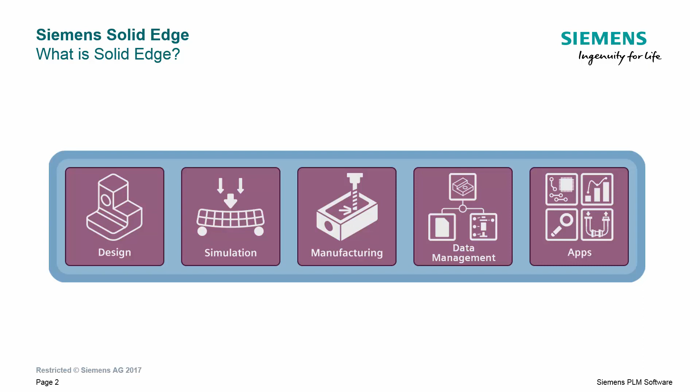The first segment is design, and is the core of what Solid Edge is all about. Solid Edge allows designers to intuitively create all aspects of their digital models, starting with conceptualizing and designing individual parts, using those parts to build assemblies, to outputting manufacturing instructions to physically create the design. These capabilities are supported by best-in-class design processes, allowing users to design faster, design better, and design with more confidence.

You may be new to the world of CAD, or computer-aided design, but even so, by now you may have heard the tagline, Solid Edge with synchronous technology. But what does that mean? To get a better understanding, let's take a brief look back in the history of CAD.

3D CAD started to become popular in the mid-1990s. Designers used collections of features such as extrusions, lofts, sweeps, revolutions, cuts, and holes to build digital models. Each new feature had to be built on top of the one created before it, utilizing the outcome of the previous in order to create the next. This process has been coined history-based modeling, or ordered modeling as referred to in Solid Edge.

Solid Edge has supported ordered modeling methods for over 20 years with both its strengths and inherent challenges. In history-based modeling, the structure and order of features control how models will react to changes or edits. This is valuable because it creates predictable results from edits on underlying sketches using precise dimension changes. Because of this feature control, automating changes and linking features together is quite easy.

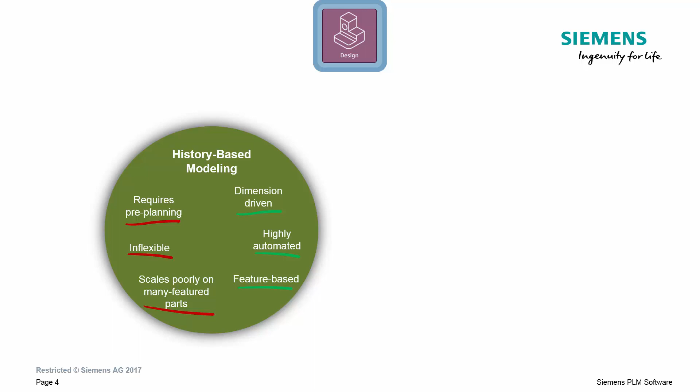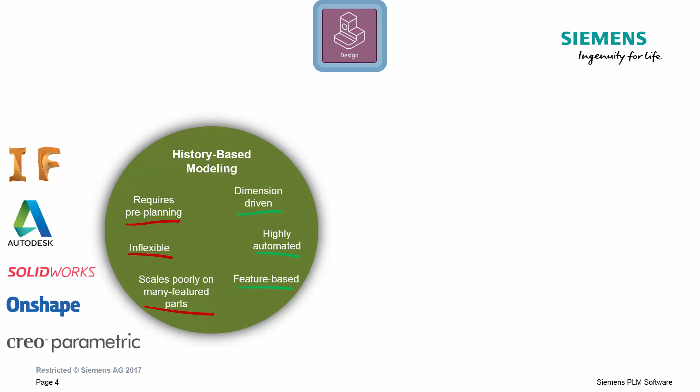And if a part contains large amounts of features, recomputes become quite taxing on computer performance, taking minutes to hours to recalculate the final result. While Solid Edge provides a choice to its users on how they wish to model, most other big names in the CAD industry only offer the history-based method. As there's no way around these inherent design challenges with history-based modelers, what other options are available?

Next up, direct modeling. Direct modelers use the complete opposite approach to design, maintaining no history of how a feature or a model is built, allowing for edits directly on the geometry on screen. Like history-based modeling, this contains its own values and challenges.

Direct modeling allows fast and flexible edits because there are no sketches driving features that make up the part. Editing is done by simply selecting what you want to change and changing it. With no rebuild of features after the changes, there are no performance issues on edits with direct modelers.

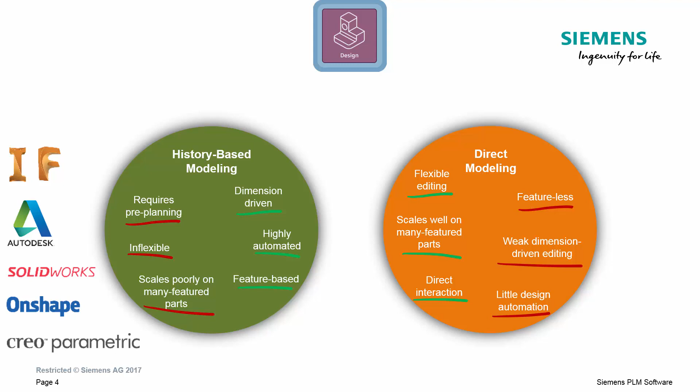However, since there aren't any features or history on how a part is made, creating precision edits or automations using parametric inputs such as dimensions is impossible. This creates a big issue for designers needing precision for their digital models. Some examples of CAD systems using the direct modeling paradigm are listed here.

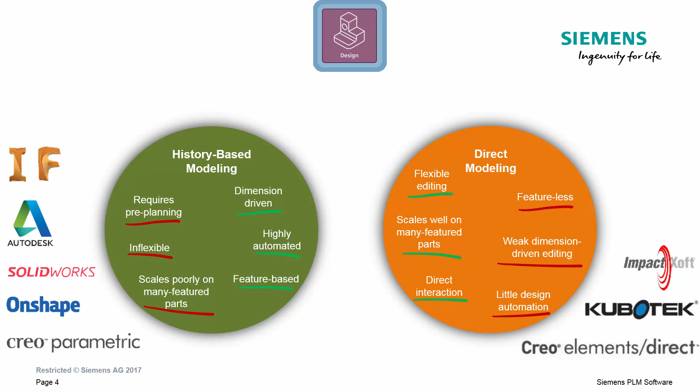Seeing the challenges associated with each type of modeling, Siemens worked to find an answer that leverages the strengths of each modeling paradigm while negating the weaknesses. This unique solution is known as synchronous technology. Synchronous technology can only be found in Solid Edge in the mainstream CAD market.

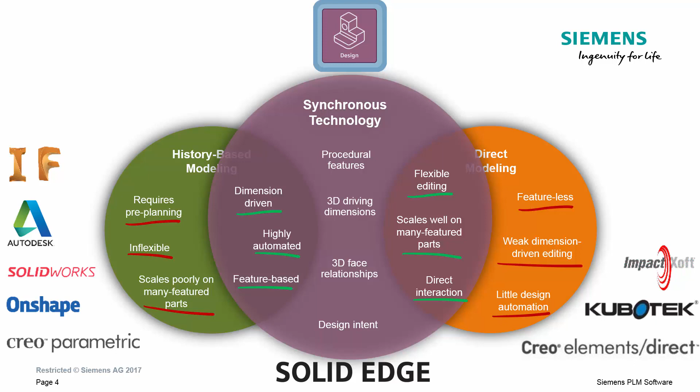Synchronizing the strengths of both history-based and direct modeling paradigms, and adding in its own innovative and powerful capabilities, users finally have a powerful solution offering easy-to-use and intuitive workflows. No other single CAD program can do what Solid Edge can do with synchronous technology.

Most customers say that their biggest challenge is getting designs done faster. We'll show how Solid Edge not only aids engineers and designers to design faster, but allows them to design better as well. Solid Edge's unique synchronous technology enables customers to be more productive and efficient than ever before.

Built-in design tools intuitively help to get initial designs done right the first time. And if any changes need to be made, Solid Edge's synchronous technology allows users to change the model based on what they see on screen, without time-consuming failures due to feature recomputes. By speeding up the initial design phase and making changes faster, Solid Edge customers maintain a level of increased productivity, enabling them to deliver sooner, lower their business risk, and grow revenue at a higher margin, leading to increased satisfaction of their customers.

As mentioned earlier, history-based is the most prevalent and well-known modeling method on the market today. With this, it has become commonplace to spend a lot of time and care constructing and constraining complex sketches in order to preserve the intent of a particular design, not only for Solid Edge ordered users, but designers using any other history-based CAD system, as seen earlier.

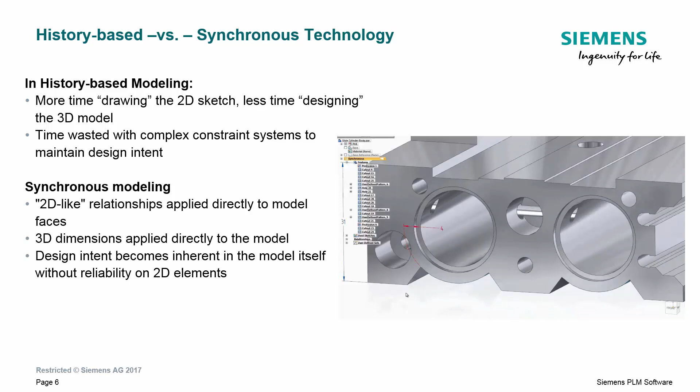However, Solid Edge synchronous technology allows designers to freely make changes to design intent using the 3D model faces themselves, allowing for intuitive changes to designs. This design intent can be changed using 3D dimensions, face relationships, and constraints.

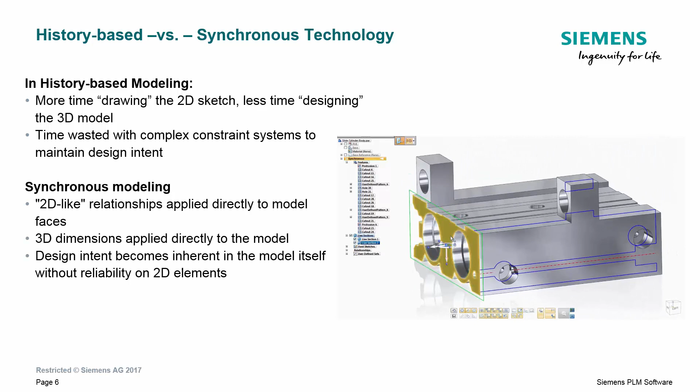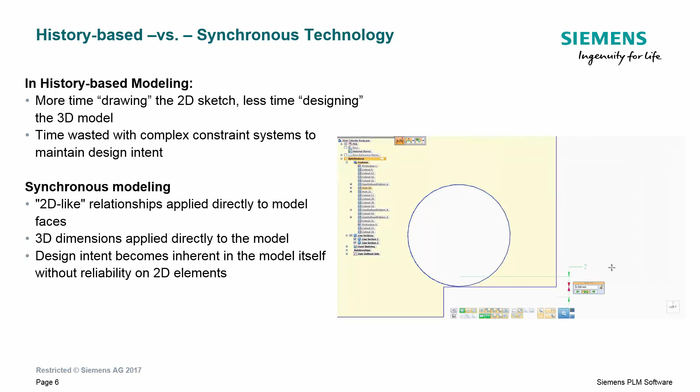The true power of synchronous, however, is that a majority of the design intent of a 3D model is inherently recognized and maintained through the software without any physical actions from the designer. Things like coplanar faces, concentric cylinders, and symmetry are all automatically detected during an edit and can be automatically maintained with no user interaction, thanks to the synchronous design intent panel constantly monitoring these conditions. These are reasons why using synchronous technology makes designing faster and better.

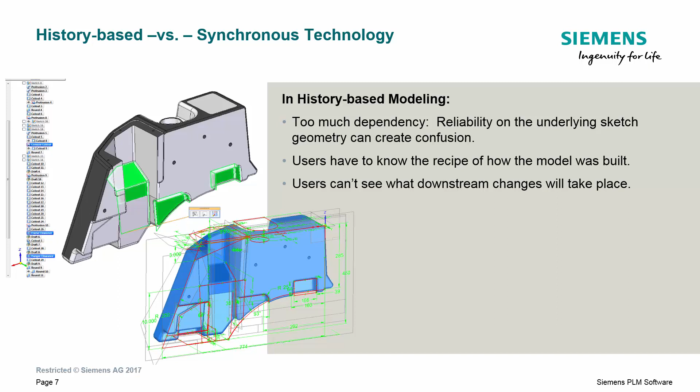Without the recipe of how a history-based model was constructed, a designer will need to spend a lot of time interrogating the history structure in order to understand how it was built. This is critical to understand when making edits, otherwise any change made has the potential to create a lot of cleanup and rework, or even potentially destroying the model and forcing a complete redesign.

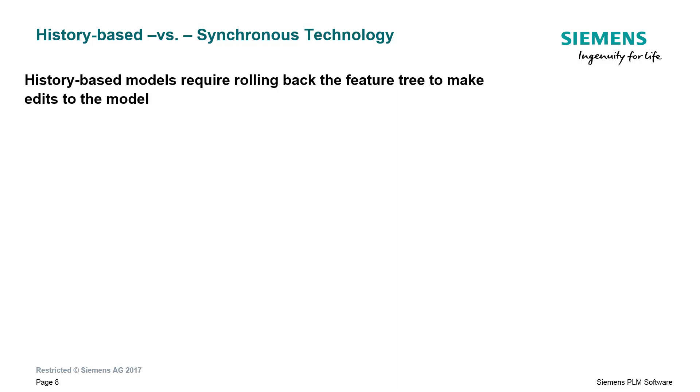To show a comparison of the two, let's take a look at the process for editing an ordered or history-based model, and then see the same edit using synchronous technology. First, the ordered model. For this example, a designer needs to edit the angle on the front face of this fuel tank. Once we dig into the part and find the feature that controls the angle, we can go and make the desired edit.

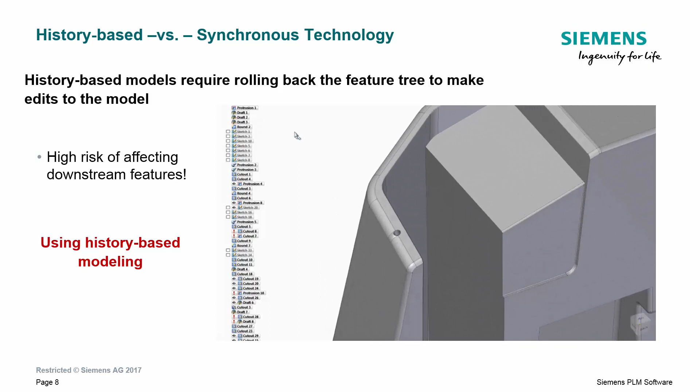However, seeing as the base shape was one of the first features created, there's a lot that goes wrong when the change is made, leaving a gaping hole in the middle of the tank and requiring a lot of effort to fix all of the broken features.

However, using the exact same model, a user can transform all of the features into synchronous features and then just visually make the changes needed. Notice that no additional design intent has to be added. Solid Edge simply looks after the design while the edit is taking place, giving us our desired change in just a fraction of the time.

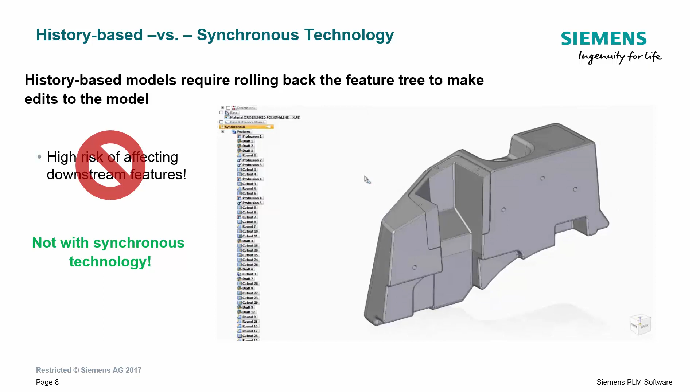Now that we understand the basics of synchronous and ordered modeling in Solid Edge, let's take a look at some of the other important functionality offered.

To begin, sheet metal. In addition to part design, Solid Edge also accommodates for industry-leading sheet metal design capabilities, with both synchronous and ordered modeling methods. Using powerful straight break and deformed sheet metal specific features and functions, to flattening a complex sheet metal part for detailing and manufacturing, intuitive sheet metal creation with Solid Edge reduces cost and speeds delivery of our customers' designs.

Next up, assemblies.

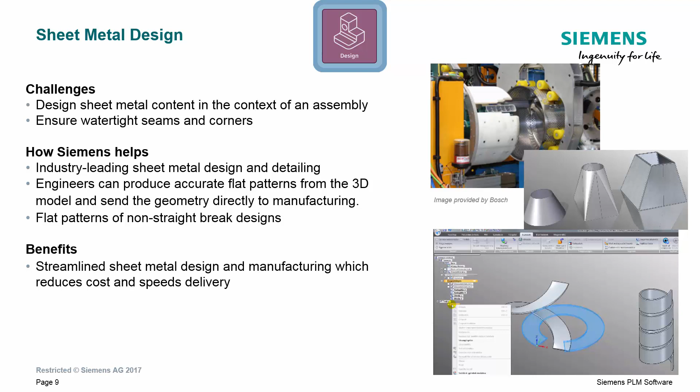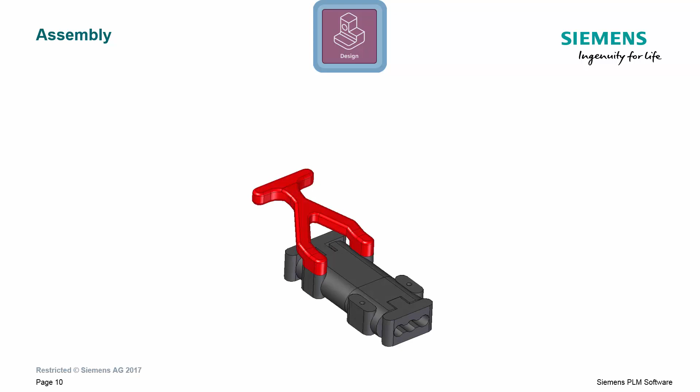Assemblies are made up of collections of parts put together just as they would be in real life, allowing designers to visualize exactly how their designs will look and work. Assemblies can range from just 2 parts all the way up to thousands or millions of parts put together. The larger an assembly, the more difficult it becomes to work with.

Working with very large assemblies can be a challenge for any CAD system, but with the many tools included with Solid Edge, specifically designed to help with performance and management of large amounts of design data, it becomes a more manageable task. So let's take a look.

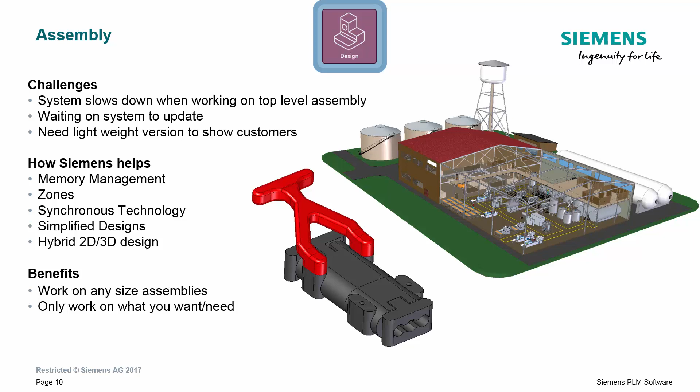First up, zones. Zones make working with large assemblies even more manageable and add to improved performance. Zones allow designers to define a permanent range box to isolate areas of large designs they are responsible for. It doesn't matter whether the parts included in the zones are part of the same assemblies or subassemblies. As long as they're in the viewing area of the zone box, they'll be shown.

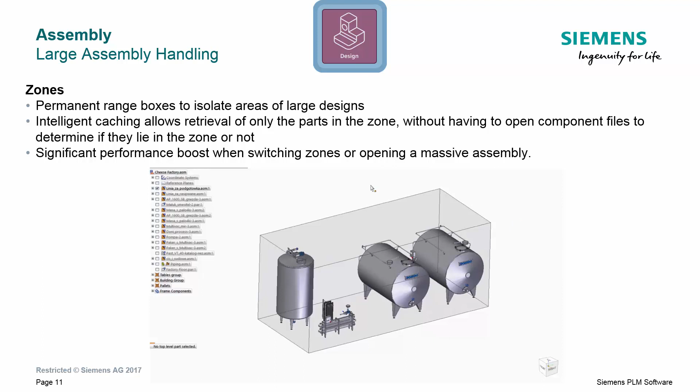Once created, using zones to open large assemblies is a great way to access a specific section without needing to fully load the entire assembly.

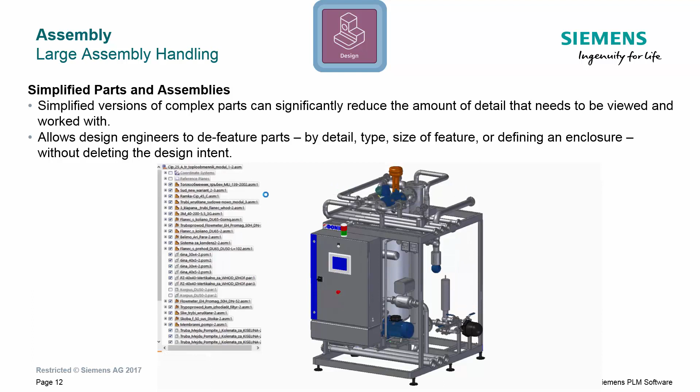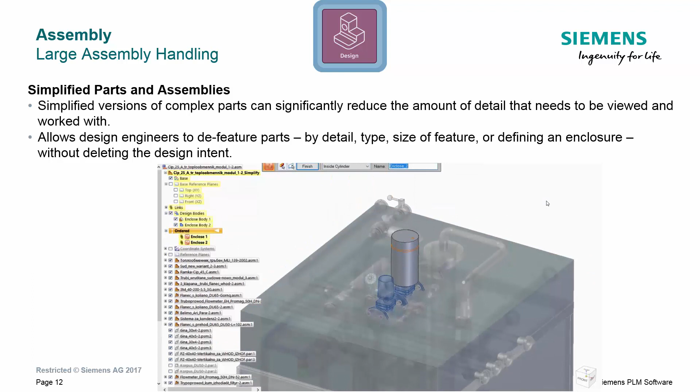Even if you're using zones, there still could be a large amount of data needing to be accessed at a single time. Another great productivity enhancer for large assemblies is to use simplified versions of complex parts. Using a simplified part significantly reduces the amount of detail needing to be loaded and shown. This improves display performance while still giving engineers a way to completely visualize the design.

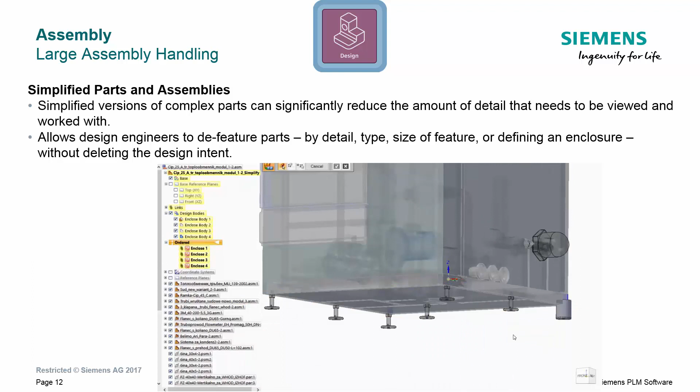Simplifying parts in Solid Edge allows design engineers to fully control how they wish to de-feature parts, allowing for representation as a simple, lightweight shape, or isolating key positioning or working geometry. Of course, engineers can easily switch between simplified or detailed versions of models if and when they need.

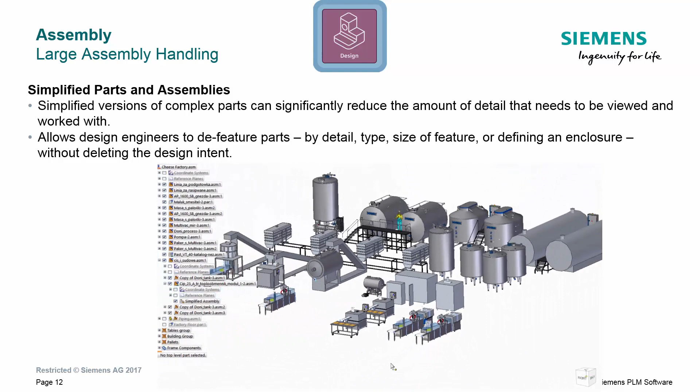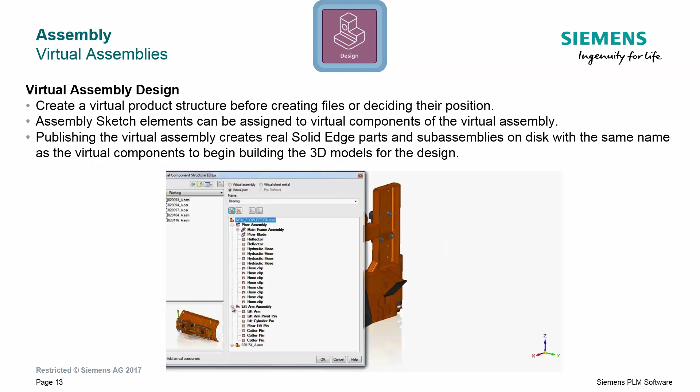Not all design concepts have to be originated solely in 3D. Solid Edge provides the flexibility to create a virtual product structure before creating files or deciding their position. Start by building your virtual assembly using common part representations. And once the assembly structure is the way that you want it, simply publish the virtual parts list to create

the actual part files with associated sketches or components already placed within. This unique hybrid 2D-3D design approach provides engineers a means to quickly create virtual product structures during a design concept and then publish the virtual parts into 3D designs. Just another way Solid Edge allows you to design more efficiently.

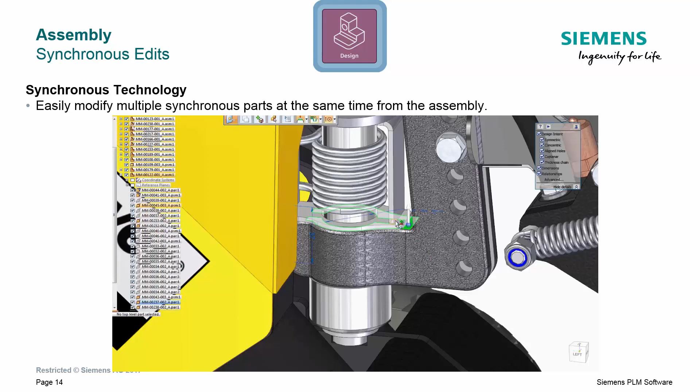So we've talked about improving productivity with accessing, viewing, and building assemblies, but what about edits? Once again, synchronous technology comes into play. Not only is synchronous technology great for building and editing parts, but it can be a great productivity booster in assemblies as well. While there are many ways to leverage synchronous in an assembly, geometry modification is a key one for productivity, especially since you can modify multiple parts at the same time.

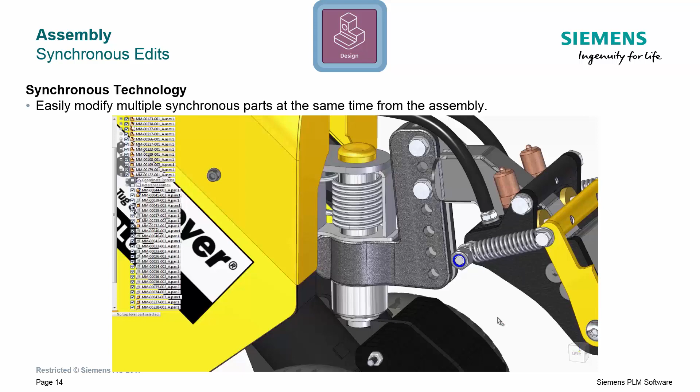For example, we need to thicken a machine tilt arm, but if it adjusts, multiple parts around it need to adjust as well. No more calculations or writing down values to remember changes. Just select what you want to move and move it.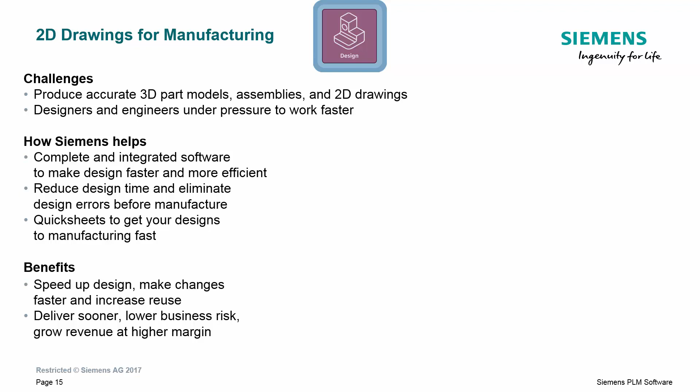Next up, drawings. Creating 2D drawings from 3D designs is a critical piece of the design to manufacturing process. Solid Edge has the best tool set in the industry for generating drawing views, dimensions, and annotations quickly and efficiently once the 3D model is created.

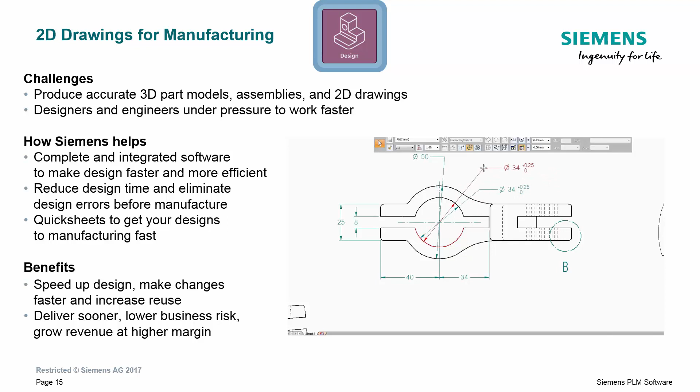View layout and placement is intuitive and easy, and dimensions and annotations that were used in the 3D design can be automatically retrieved and used on the drawing representations. Once your drawing layout is exactly how you want it, creating a Quicksheet allows you to easily duplicate that look and feel, even remembering how you want your detailing to look.

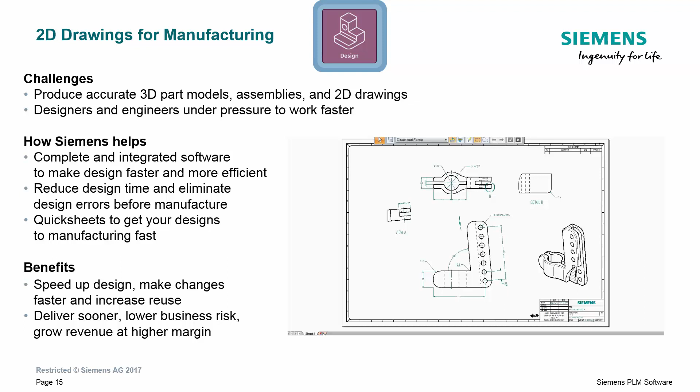Of course, ensuring that your drawings are up to date is critical. Since the drawings are generated from the 3D design, any changes made will be shown through Dimension Tracker, a powerful Solid Edge tool that tracks any changes made to the model and then shows the designer the updates in the drawings. Creating complete drawings quickly is just another way in which Solid Edge decreases time to market, lowers business risk, and helps to grow revenue at a higher margin.

As technology continues to progress at a rapid pace, it's important for digital designs to keep up.

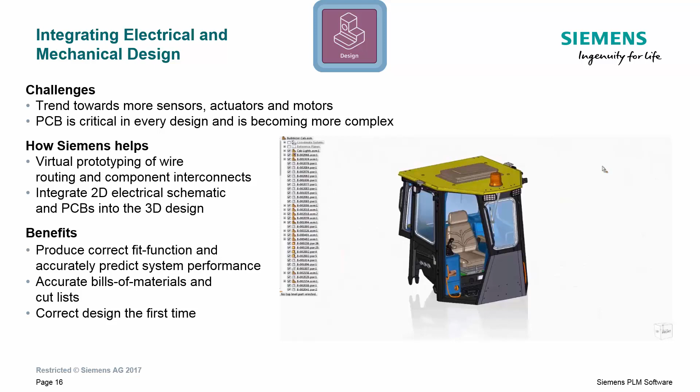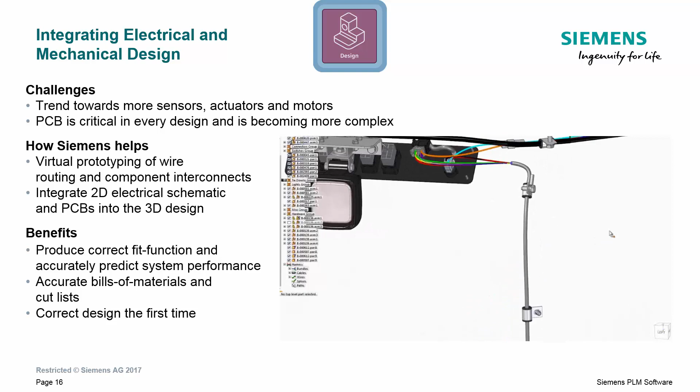A key part of this in machine design is the integration of mechanical and electrical components, such as motors and sensors. Whether creating wires, cables, or bundles from scratch, importing complex electrical CAD schematics to create custom harnesses, or simply rerouting or adding wires to existing harnesses, Solid Edge provides easy-to-use tools to virtually route and connect any electrical components with ease.

But what about building the harnesses? Solid Edge provides full support for nailboard design, laying out exactly how they'll be put together, from exact cut lengths to connector and pin locations.

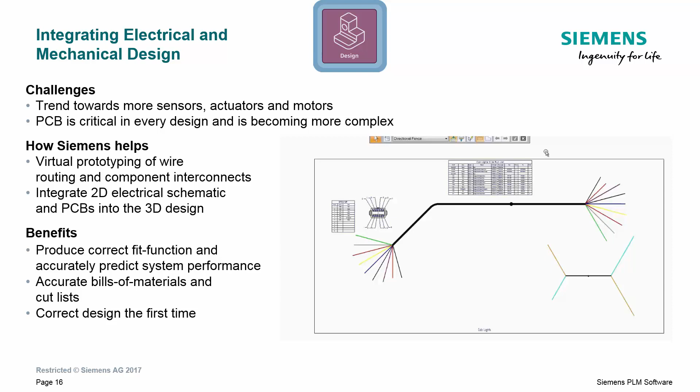And speaking of electronics, printed circuit boards can also be designed in Solid Edge using one of the many integrated apps. Next, let's talk about frames.

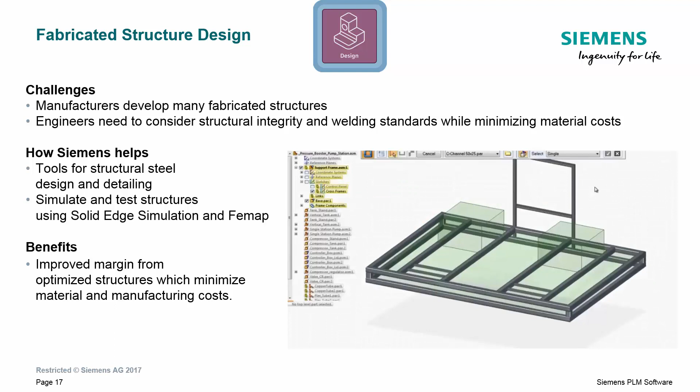A large portion of designs utilize frames for either primary components or support structures. Solid Edge provides users with tools to automate frame creation, allowing them to build and control structures using a large delivered library of standard cross sections.

Solid Edge also provides a choice in how frames are created. Using synchronous sketches and 3D body edges to place frames provides users flexibility, allowing for simple and intuitive edits. And with universal and individual end condition settings, Solid Edge easily manages corner and connect conditions with full control of miters and coping in a simple one-click process.

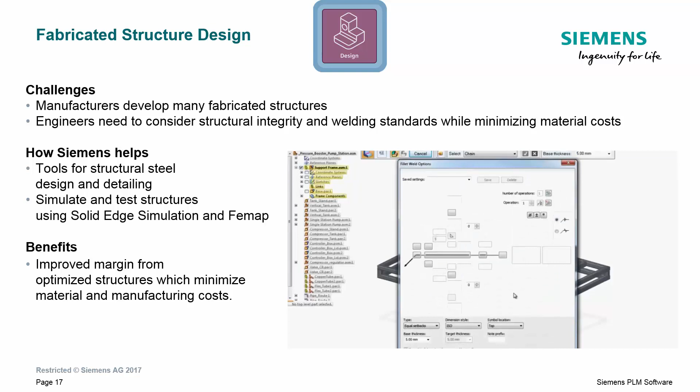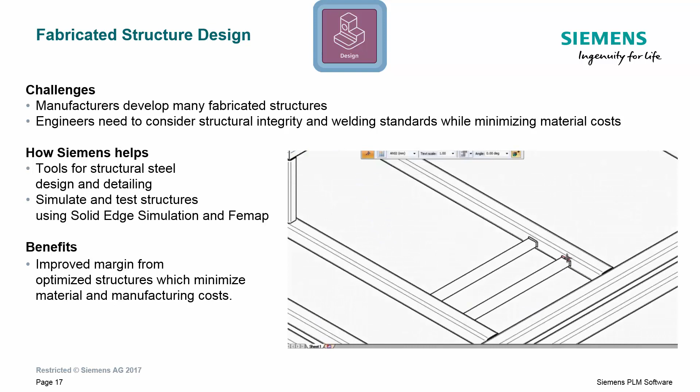And as a framework is built, welds are needed to hold them together. Solid Edge offers a complete toolset for weld bead creation. This includes every type of common weld, as well as custom welds and annotations for use in manufacturing drawings.

Once built, Solid Edge Simulation can test the frame structures for strength. Solid Edge Simulation not only offers analyses specifically for beams, but also supports static studies for linear, thermal, buckling, and vibration studies on both solid bodies and surfaces. But don't worry, we'll cover more Solid Edge Simulation in just a minute.

As is true with most assembly designs, there needs to be fasteners to bolt, screw, or pin components together. Solid Edge provides an extensive library of fastener components based on any common standard and automates their creation and placement. This automation saves designers lots of time and headache not having to model and place the fastener stacks individually.

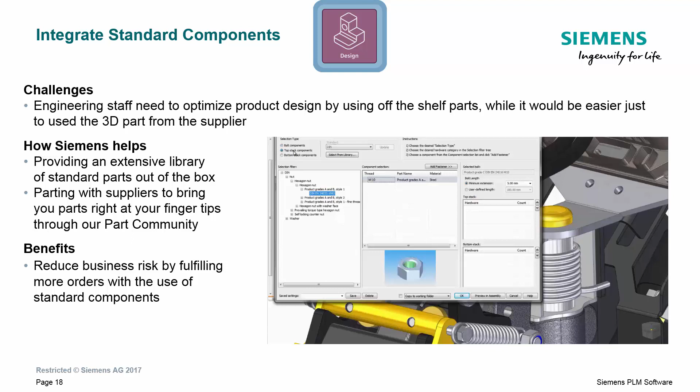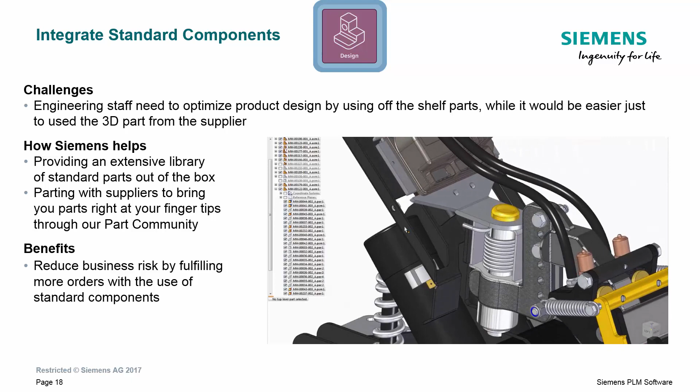These stacks of bolts, washers, and nuts are automatically determined based on a selection of entrance and exit holes in an assembly. A collection of fitting, standard fasteners will then be presented to the engineer to choose which set will work best. Once a fastener is selected, Solid Edge will automatically generate the parts and assemble them in place.

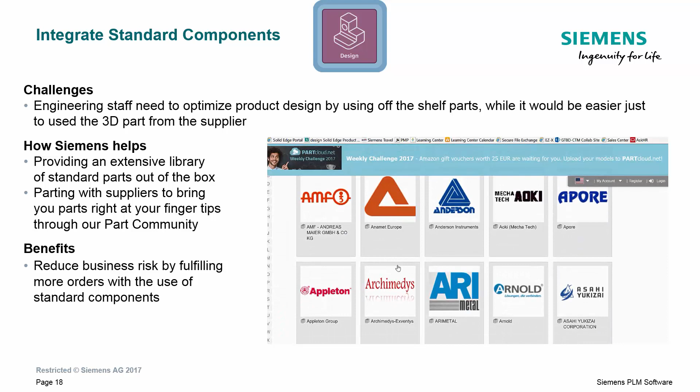But what about standardized, off-the-shelf parts that aren't fasteners? No worries. Solid Edge also has access to multiple part communities where customers and suppliers share their off-the-shelf components.

Once a design or concept has been created, making sure that it is properly represented is important. Solid Edge provides users with best-in-class photorealistic rendering capabilities through world-renowned KeyShot. KeyShot directly reads in models through a live link with Solid Edge, enabling customers to generate photo-quality renderings of their designs for internal or external marketing before the first part is ever produced.

Generating photos and animations in KeyShot is a single-click process, maintaining and mapping important information such as colors, orientations, and even pre-existing model animations, saving both time and effort while creating renderings.

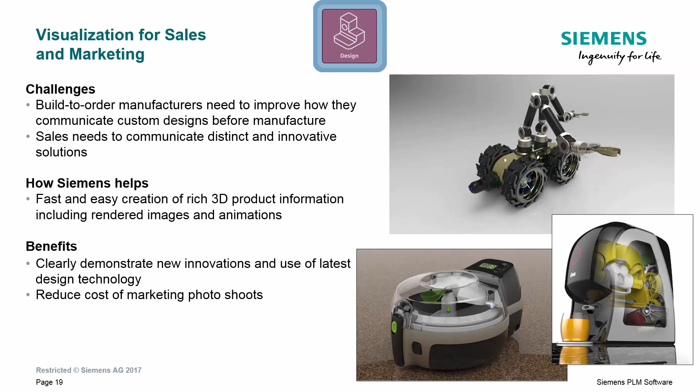What we've seen to this point is a subset of some of the most widely used functionality in Solid Edge. These design tools are split out and provided in different product packages depending on a customer's needs. The most common package is Classic and includes most of the basic design capabilities needed in industry.

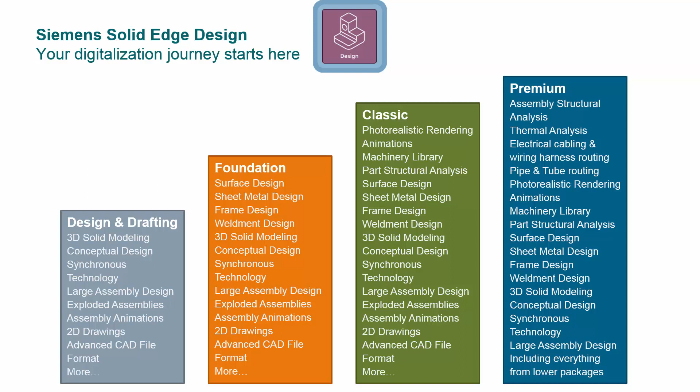If customers need anything in a more specialized area of design, such as electrical routing, pipes and tubes, or Solid Edge simulation, an upgrade to Premium is the best option. Additionally, Solid Edge provides customers with a choice of how they wish to access their design data, providing licensing options for rental, also known as subscription, perpetual, which is Solid Edge ownership, and cloud licensing available.

So there we have it, a nice collection of capabilities that prove invaluable to our customers. But remember at the beginning of the course, we said that Solid Edge was a comprehensive portfolio of tools for customized solutions. And seeing as we've only covered design, let's have a look at what makes up some other key areas of the Solid Edge portfolio.

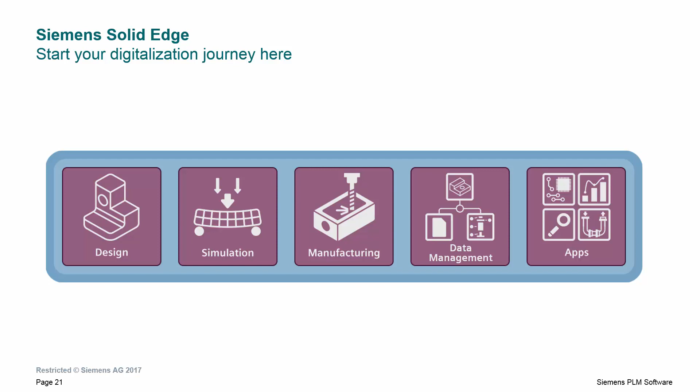As we touched on earlier, simulation for virtual product testing is part of this portfolio.

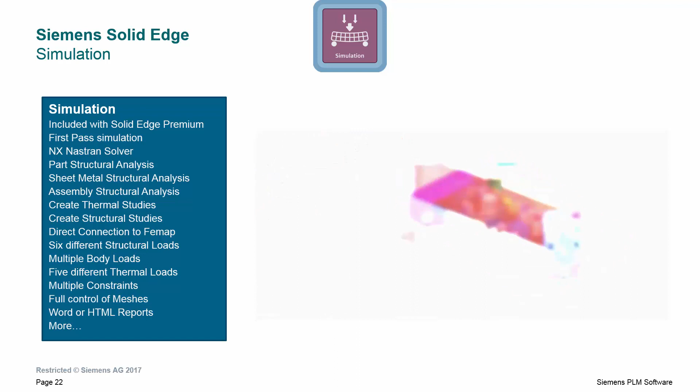Solid Edge simulation is intended to be intuitive and easy to set up, created with the design engineer in mind, so you don't have to be a specialist to use it. Solid Edge simulation is a great tool for designers to optimize their designs in a working environment, ensuring that they're not only strong enough, but also not over-engineered and costing more than necessary in manufacturing costs.

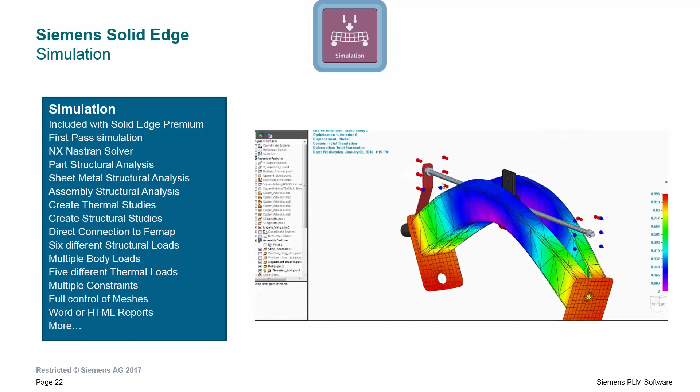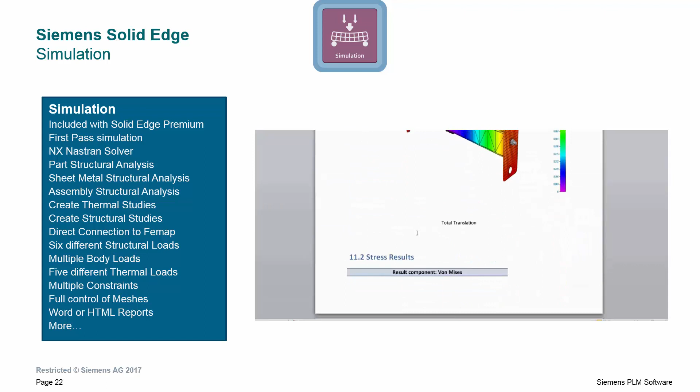With studies to test for strength, thermal, vibration, buckling, and even fluid flows, Solid Edge simulation helps designers know exactly how their parts and assemblies will work well before they're created. And rest easy knowing that the results are true, as the underlying engine uses Siemens' own software such as FEMAP and Nastran, industry-leading simulation technology.

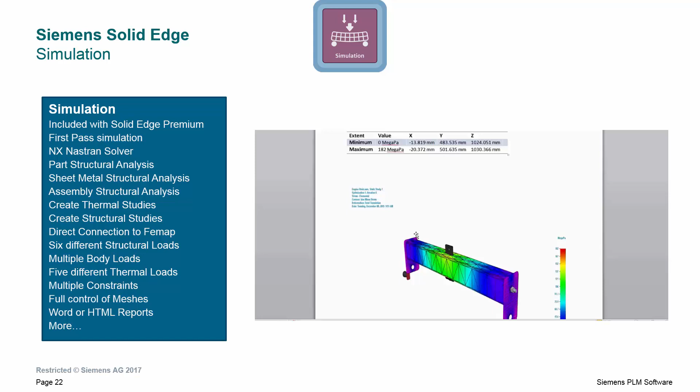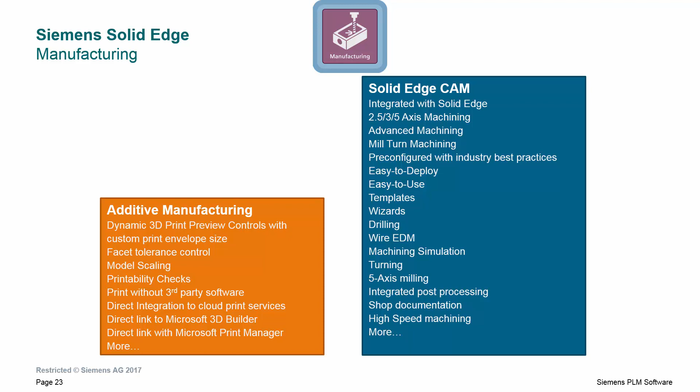Another key segment of the portfolio is manufacturing. Solid Edge continues to push the envelope, developing solutions for increasing technological advancements with manufacturing processes. Two of the main manufacturing processes prevalent today are additive and subtractive manufacturing.

Additive manufacturing describes creating parts by building material on top of itself, as seen with 3D printing. Solid Edge provides users the ability to not only directly connect to a printer and fully control their print output, but also to automatically receive quotes on costing of design parts from popular 3D print businesses, where they'll print and ship them straight to your door.

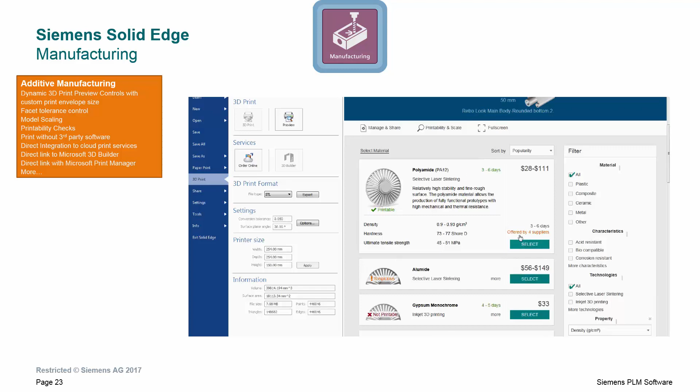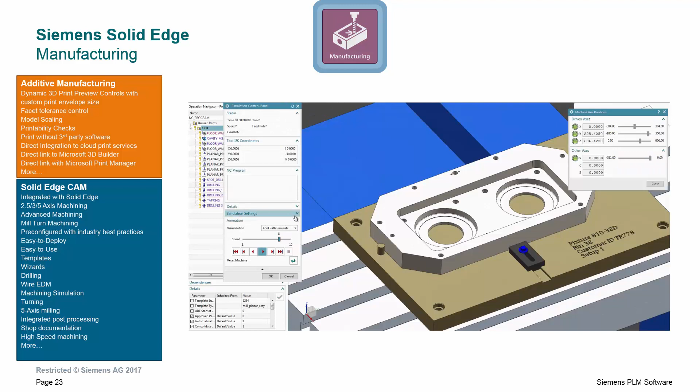And next, subtractive. Subtractive manufacturing is the concept of removing material from a larger chunk, carving out your final designs with CNC turning or milling operations.

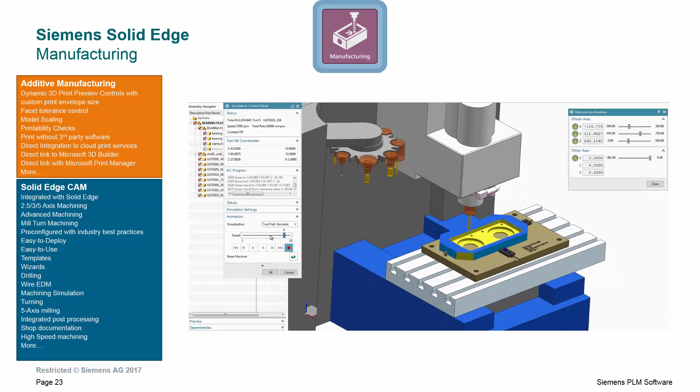Solid Edge has scalable computer-aided machining solutions, or CAM for short, designed to do just that. From direct interaction with the model for associative toolpath assignment, G-code simulations to show the full finished manufacturing process, to 2.5-axis and up machining process support, Solid Edge CAM solutions support digital instructions for manufacturing parts, no matter the complexity.

Next up, data management. No matter the size of a company or the amount of design work done, secure and accurate data management is important to get control of your data, improve collaboration, and speed completion of your design projects. Data management is another area of the portfolio that continues to grow with advances in technology and the demands of industry. To answer these demands, Solid Edge provides scalable data management solutions to meet the specific needs of different manufacturers.

These solutions are broken up based on the target audience it is designed for. We have entry-level for VSB, or very small businesses; mid-level for SMBs, or small to medium-sized businesses; and high-end for enterprise, or very large businesses.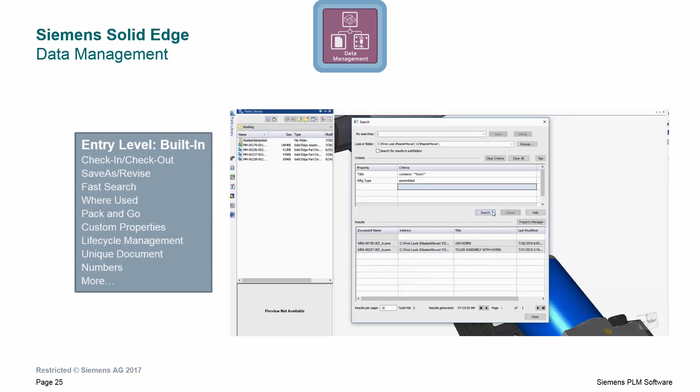First, our entry-level solution, built-in data management. Built-in is delivered free with every seat of Solid Edge and requires no IT overhead, as it leverages Windows indexing and file control functionality. It is primarily intended for VSB, or very small businesses, with 1 to 5 seats of Solid Edge, but is also a great starting point for any company, offering key data management functionality such as check-in, check-out, file locking, search and where-used tools, unique document naming enforcement, and cloud-based collaboration.

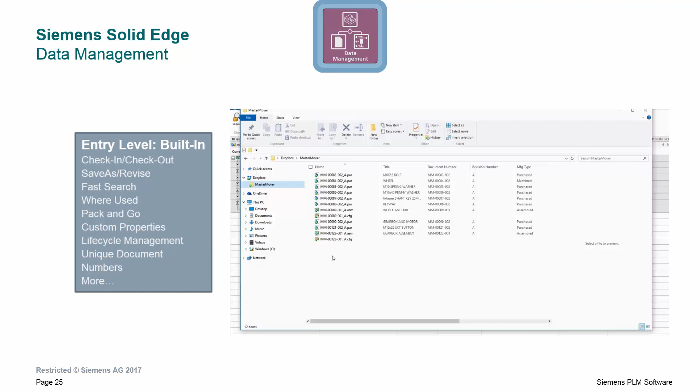These tools and capabilities allow built-in users to maintain the integrity of their data on a day-to-day basis, as well as allow for a much easier process of transitioning if a larger data management solution is needed down the road.

Next are mid-level and high-end solutions. The mid-level solution is intended for SMBs, or small to medium businesses, with 5 to 15 seats of Solid Edge that generally need more complex processes for data management. This includes defining user roles, automated development and release processes, and management of non-CAD data.

Depending on a customer's needs, mid-level data management can be accommodated in multiple ways, primarily with Teamcenter Rapid Start, but with new unique capabilities being added as new technologies and challenges arise. Teamcenter Rapid Start is a pre-configured delivery of our high-end data management solution, Siemens PLM Software's Teamcenter, the most comprehensive product lifecycle management solution available today.

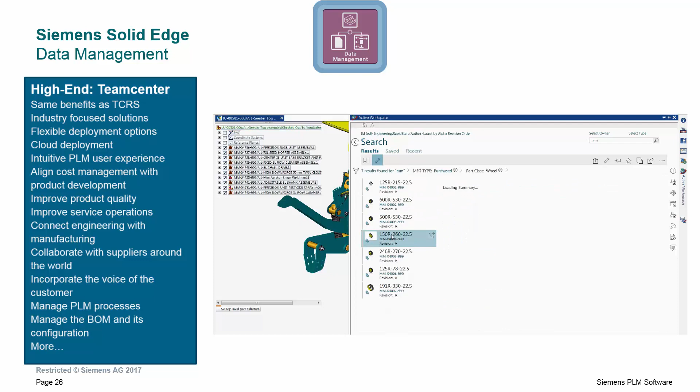Teamcenter provides users fully customized control over how they wish to work with and store their data. With direct access to your parts and assembly files from within the Solid Edge application, and the automatic completion of many tedious data management processes, accessing and working with your technical data is faster and more intuitive than ever before.

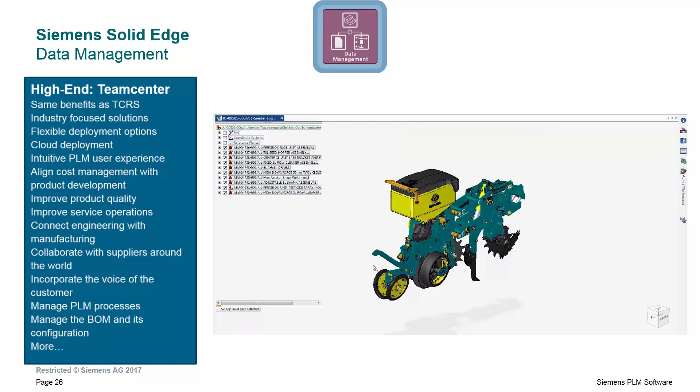While the intent of the above-mentioned solutions are based on business size, each of these scalable options can be used by any size business, depending on the complexity of their design processes.

And finally, Solid Edge apps. To provide additional solutions outside of those in the core portfolio, Solid Edge provides capabilities to solve a wide variety of design and manufacturing challenges.

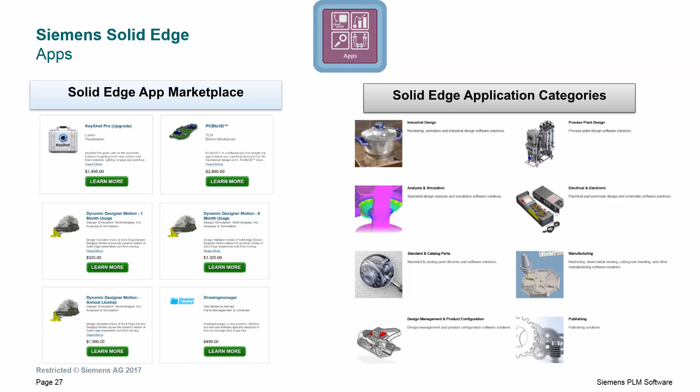Solid Edge apps provide everything you need for a fully customized solution, from PCB and wire harness schematic creation to dynamic simulation and technical publishing capabilities. For more information and a full listing of available apps, check out the Solid Edge app marketplace online.

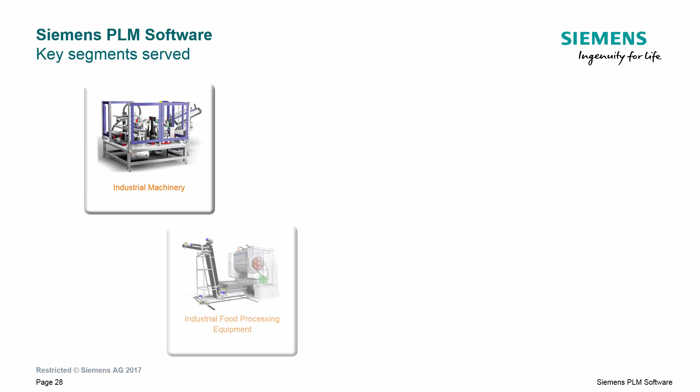Not only can Solid Edge capabilities be customized to fit individual customers, but the portfolio solutions seen earlier provide essential tools for specific industries that Solid Edge has a significant presence in. Our primary industries served include industrial machinery, industrial food processing equipment, agricultural machinery, medical devices, oil and gas equipment, and consumer durables. But, as with all software and technology, new industries are continuously coming into the fold and benefiting from the solutions that Solid Edge provides.

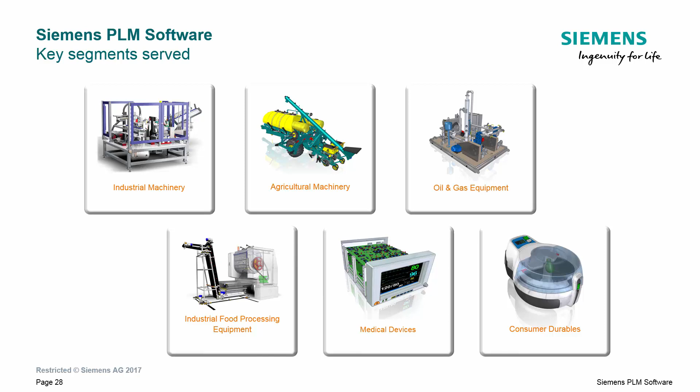In addition to the type of company or industry being served, Solid Edge is also highly sought after due to its affordability. Solid Edge's portfolio of affordable, easy-to-use tools provides ideal solutions for very small businesses, small to medium-sized businesses, and subgroups and contractors within larger, enterprise-focused companies.

Solid Edge customers maintain a level of increased productivity, enabling them to deliver sooner, lower their business risk, and grow revenue at a higher margin, leading to increased satisfaction. This is seen through reductions in design and manufacturing time, design rework efforts, and many more process improvement capabilities available with Solid Edge.

So now that you've seen what Solid Edge is, let's take a moment to define the top 5 business reasons to use Solid Edge in industry.

First off, Siemens. Solid Edge is a Siemens PLM software product. Siemens PLM software has a unique understanding of manufacturing, as it has been in business for 165 years and has around 300 manufacturing plants worldwide. This allows us to have a better understanding of manufacturing and industry, which is highlighted with the types of solutions offered.

Secondly, Solid Edge is a part of Siemens PLM software's portfolio of innovation. This makes Solid Edge a high-technology software with strong research and development resources. In addition to this, Solid Edge customers have the ability to work with other members of the PLM portfolio, such as Teamcenter, Tecnomatix, RuleStream, and NX, just to name a few.

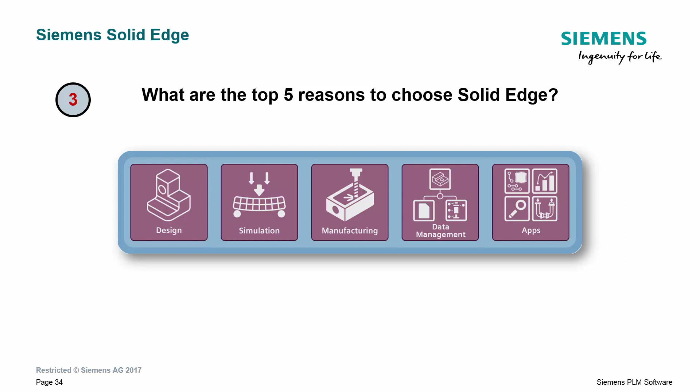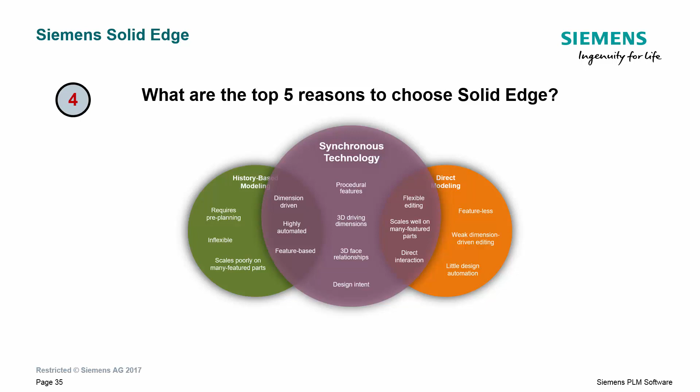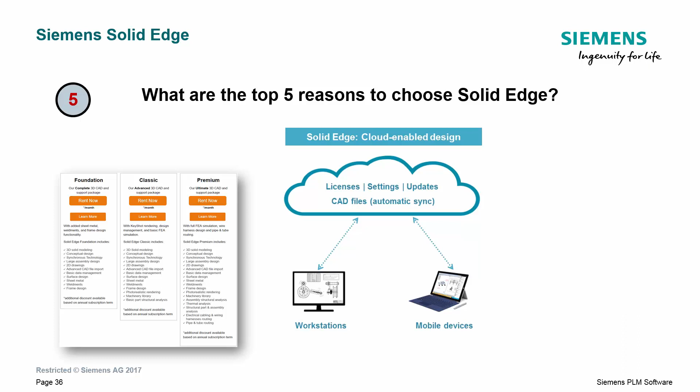Also remember the other licensing available, like subscription-based licensing, where a customer can rent Solid Edge on a low-cost monthly basis, great for startup companies and those who only need access to the software at specific times in their design cycles. And of course, the more traditional perpetual options for Solid Edge ownership.

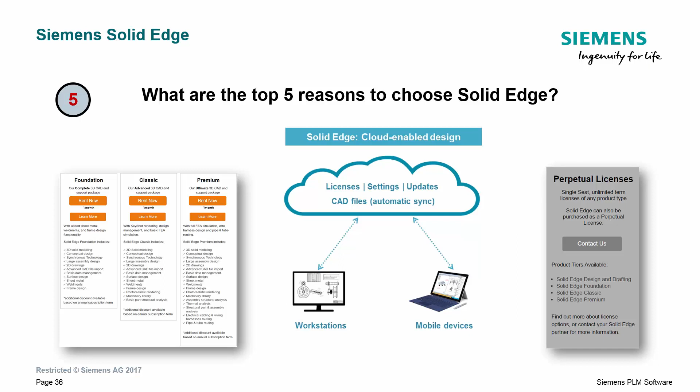So there you have it, the top 5 business reasons to choose Solid Edge. Leveraging Siemens' experience and the portfolio of innovation to provide the most complete product lifecycle management solutions. Solid Edge portfolio for intuitive tools for all of your product creation and manufacturing needs. Synchronous technology to help you design better. And the full flexibility and choice of accessibility.